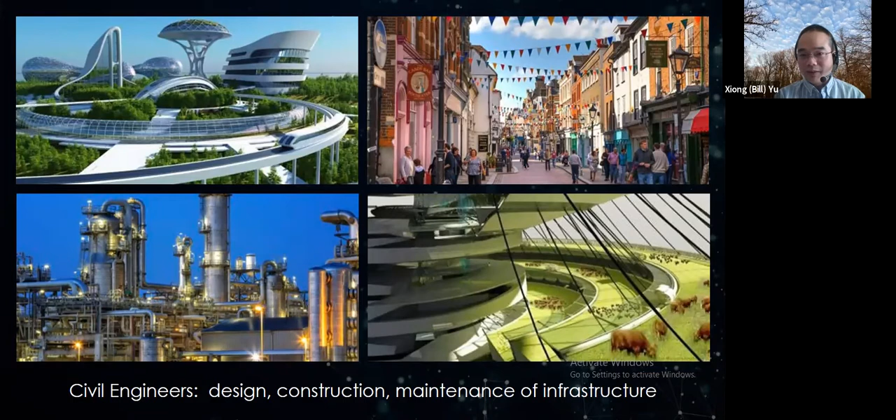We also face common challenges as our communities or society face. For example, climate change with more extreme weather, urbanization, population growth, and the demand for a greener way of life. These all put new challenges and opportunities for civil engineers.

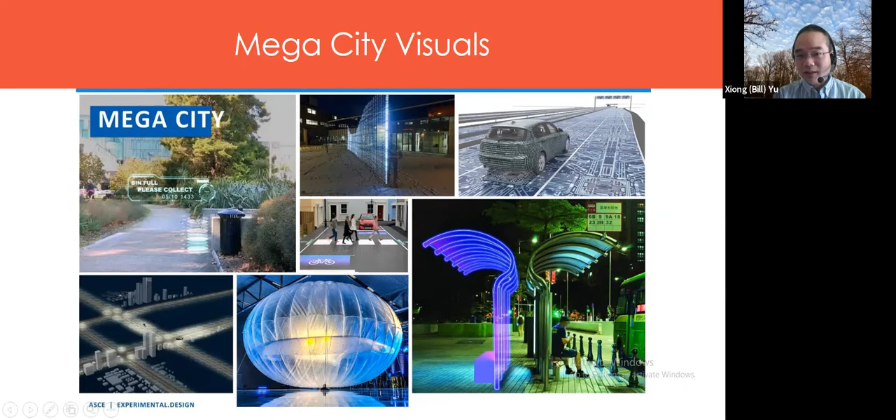The highway and road system might become a power station, charging batteries for electric vehicles. There's also a lot of smart infrastructure components built in to support community life at a mega city scale, because rural areas will also become more sustainable.

This is an architecture design for the future rural city—how the infrastructure will look, because rural areas provide a lot of support for food and other essential needs. We want them to be more resilient to disasters so agricultural productivity isn't affected by adverse climate, like drought.

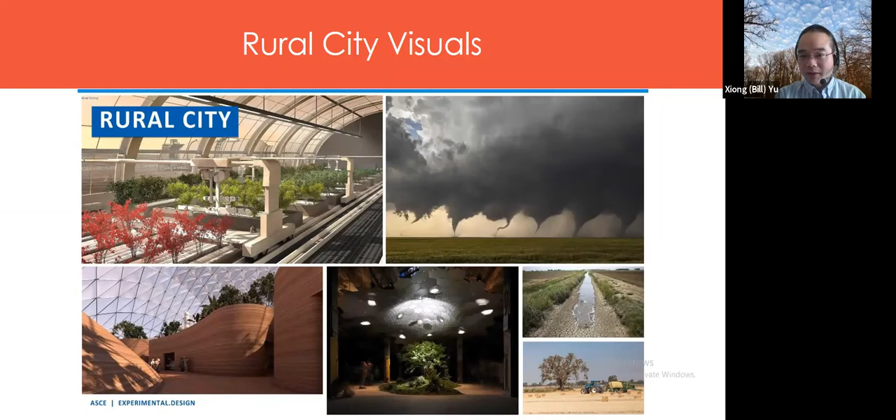There's a lot of opportunity to develop rural areas resilient to climate that provide produce support for urban communities. For people in communities near the ocean or Great Lakes, considering foreseeable climate change, there may be opportunities to develop more disaster-resilient communities, like the floating city vision.

For communities in cold regions, there's what's called a frozen city—how to support people's activities, like mobility, in a very cold climate environment. There's also space exploration, like lunar and Mars exploration. In the foreseeable future, civil engineers will be charged with building new, livable communities to support space exploration—these are some architecture designs for civil infrastructure in off-planet areas.

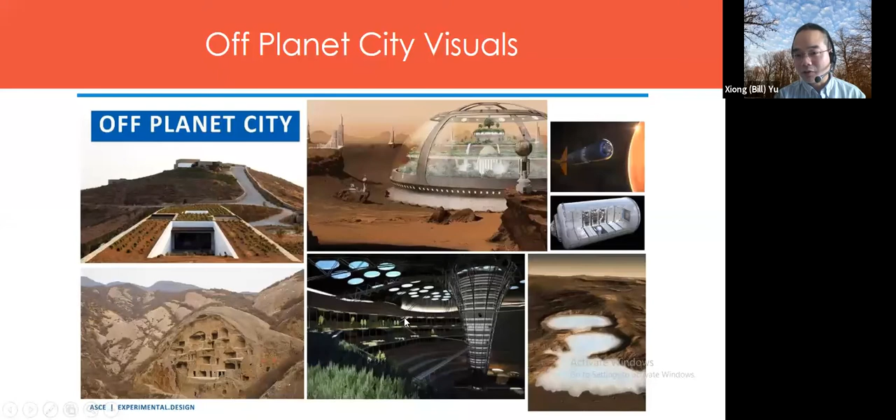In daily life, our life is also shaped by new ideas: how do we manage waste, how do we optimize structural design to achieve the best performance for ventilation as well as structural support, and how do we deal with green space and harvest energy? There's a lot of progress from civil and environmental engineering aiming to provide a better life experience for every resident of the community.

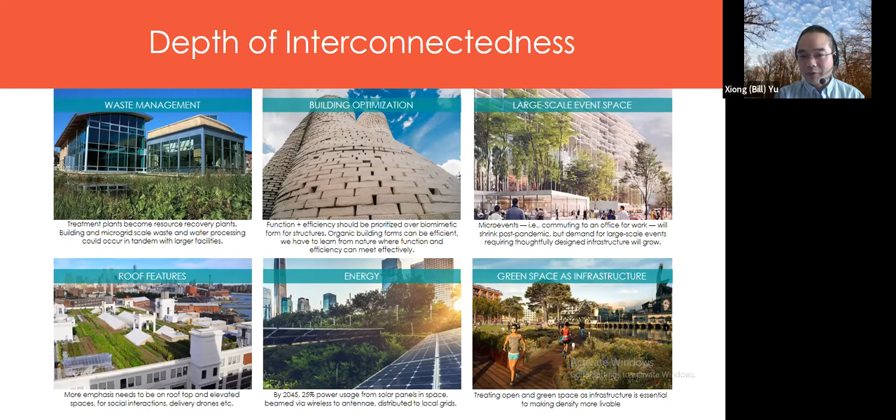For future civil and environmental engineers, we essentially need to be good at solving problems facing our communities. Future engineers also become predictors for our communities—we anticipate what may appear and prepare for it. This has been discussed by National ASCE as a skill set future civil or environmental engineers should keep in mind for their knowledge accumulation.

Toward this kind of goal, in civil and environmental engineering we have been building a lot of infrastructure support to enrich our students' research and education experience. This is a large-scale structures lab—from the photo, you can see the scale is pretty big.

So it has a strong floor and a strong wall, allowing testing of very large-scale structures. This is actually the actual component from a historical bridge in a national park that was brought inside the lab, allowing full-scale testing to be conducted.

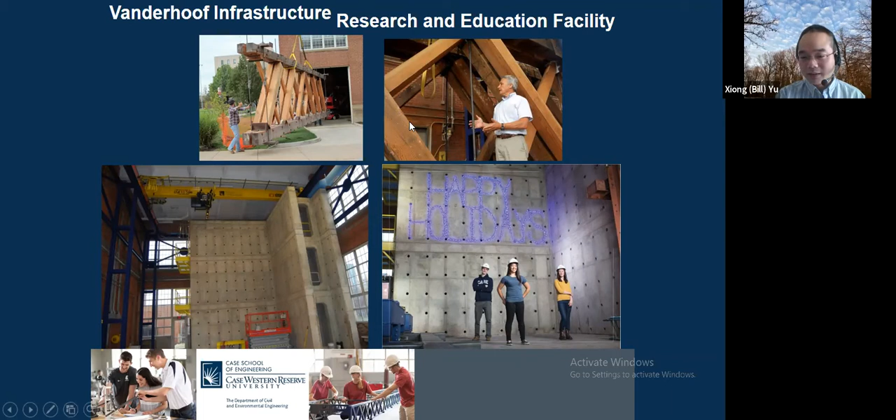This is a panoramic view of some large-scale testing, essentially looking at seismic resilience of a storage house - whether it's stable during earthquake shaking.

And then this one is about a pipeline system. We have 4 shaking tables that emulate earthquakes, and then a pipeline rises up to emulate, for example, a nuclear power plant - if there's an earthquake, whether the pipe will be safe.

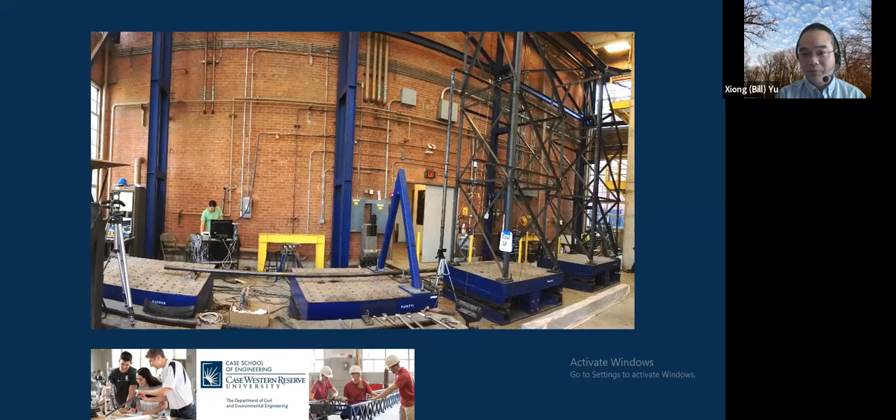Our structural engineering professors and students work on this kind of large-scale testing with facilities available at our department. This facility also allows testing of multi-span bridges, for example in California and New York, which are subjected to potential earthquake damage. These multiple shaking tables generate seismic excitation, and we can evaluate if the structure will be safe under different conditions.

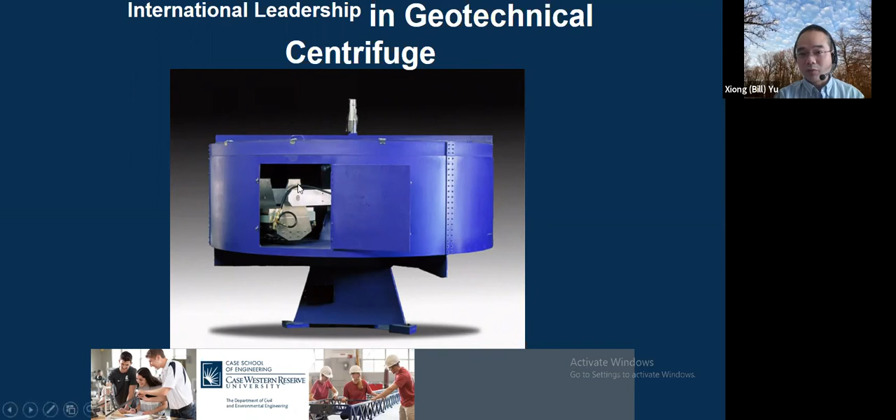Besides that, our department also has a centrifuge. It's a very unique facility that allows use of a small-scale setup to study the behavior of a very large structure. With the centrifuge, we can generate acceleration 100 times gravity, and with the scaling law, the structure can be scaled up by 100 times. So if we build a structure 1 meter in size, that represents the behavior of a structure 100 times larger. This is a very unique testing facility available at the civil engineering department here.

The department also built a new geotechnical engineering teaching laboratory, so students have the opportunity to work in groups to finish many different assignments evaluating the engineering behaviors of soil, rock, and geomaterials.

We also have department support to build a highly technology-enhanced classroom that allows student interaction with faculty very closely during the classroom setting. Everything is mobile, allowing arrangement for small group discussions.

The study area is also very popular - students usually utilize the space both for learning and for team activities and discussions.

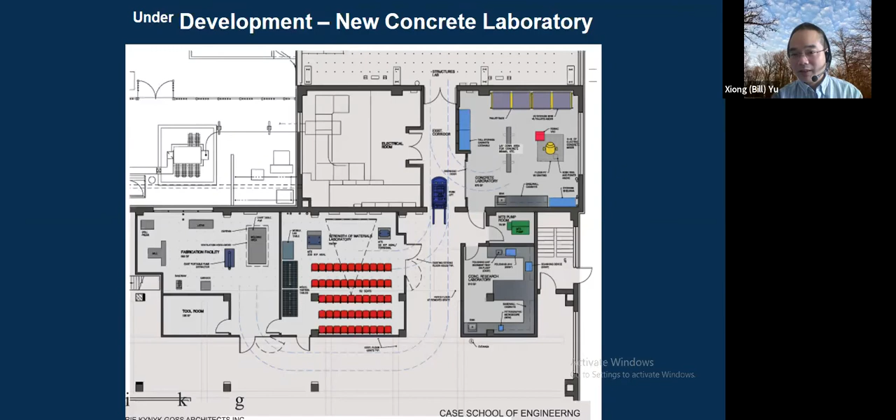The most recent development at our department is the new facility for the concrete lab. It will allow students to participate in training and also in research to study the behavior of concrete. Construction is anticipated to be finished by the end of this month, but most of it is already done. So that's the overview for civil engineering.

As for myself, I have pretty interdisciplinary training - in civil engineering, and also in computer science and electrical engineering. So my research is in a very interdisciplinary domain. I joined the university in 2003, so it's been a long time since I started working here, and I've enjoyed working with a lot of undergraduate and graduate students.

My research area is quite interdisciplinary, so it's kind of hard to capture in a short presentation. I'll share two examples, and then we can follow up with two of my PhD students who can share their research activities.

One research area my group evaluates is the multi-physics process in geomaterials. Geomaterials are porous materials - materials with void space. For example, soil that we deal with every day, and concrete and cement are part of geomaterials. Gas hydrates are energy materials, also part of geomaterials. We've broadened the concept to porous materials more generally - biomaterials, ceramics, rocks are all part of porous materials. My group studies the multi-physics processes in all kinds of porous materials.

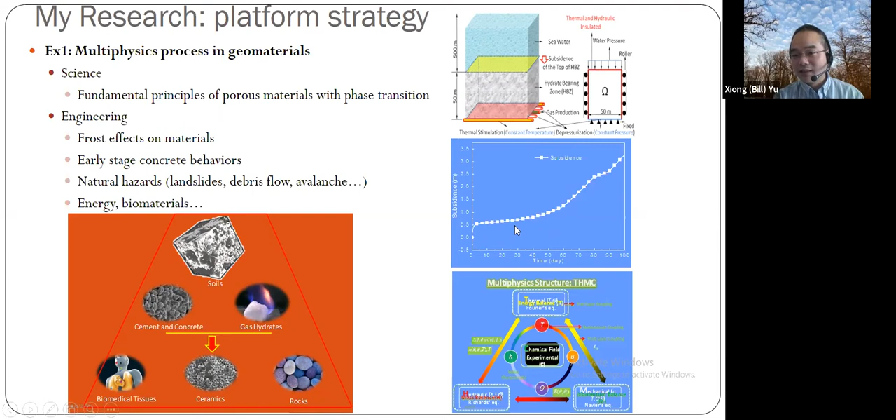In the study aspect, this is one example: for natural gas, for gas hydrate, we analyze how the ocean floor will settle when we extract natural gas from gas hydrate under the ocean, because of the energy extraction. It's a long story with a lot of effort behind it, but this shows how exploring this kind of energy causes the seafloor to subside, involving a very complex model process.

Another area of my group's research is about intelligent infrastructure. We try to make infrastructure resilient and smart.

This turns out to be a very complex issue requiring a lot of scientific evaluation. My group has been working to understand why the soils are taken away, because they are detached individual particles. We use innovative sensing strategies to help provide a warning, to make bridge users safe. So that's some of our research in this domain.

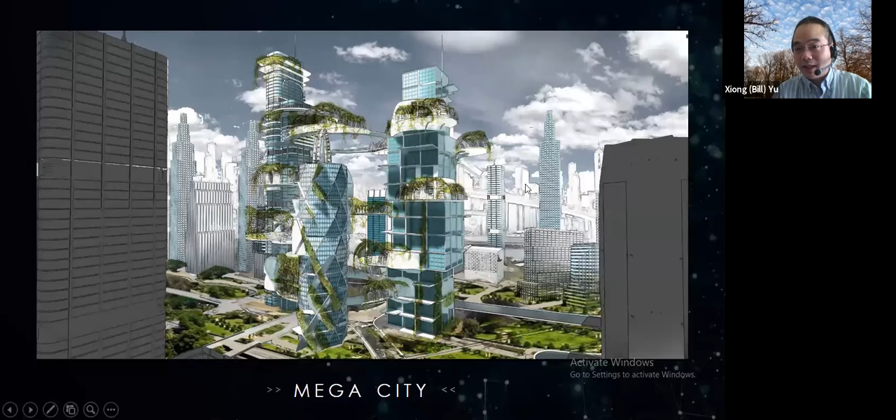And essentially there's urbanization, ASCE's vision that will lead to a lot of buildings that not only provide residential areas, but also green space that interacts with people, improving quality of life, efficiency, and connections. So that's some of the ideas of how the future of the world will look like.

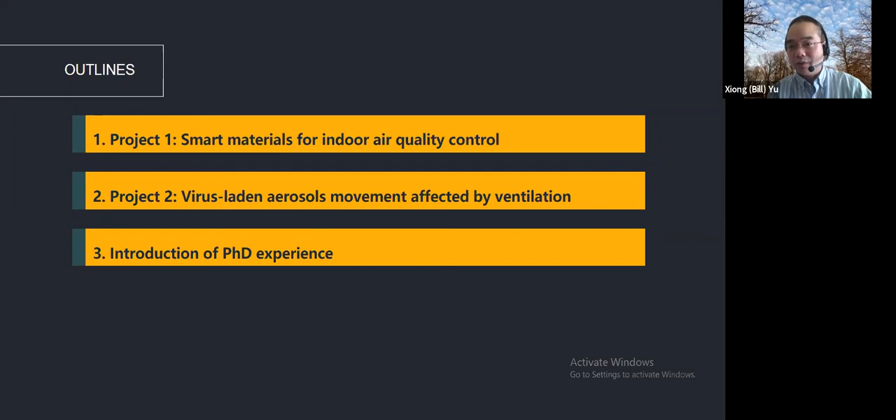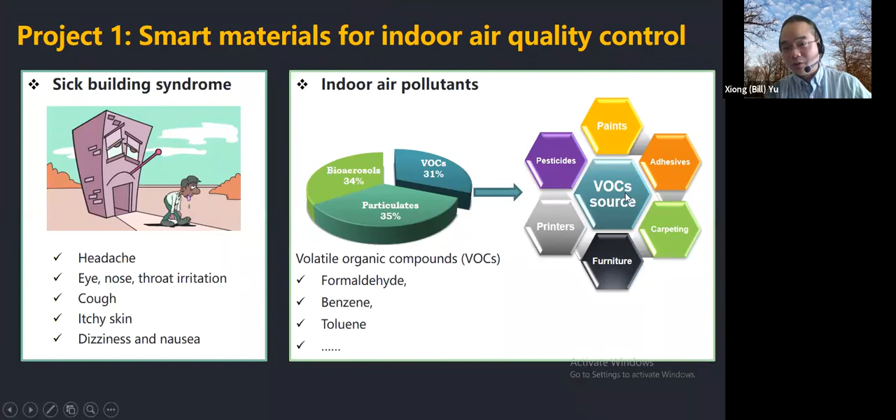She also shared some of her PhD experience. Because we spend so much time indoors, 80-90% for some people, indoor air quality is a big issue. The indoor environment has a lot of possibility for volatile gas from carpet, furniture, or old utensils, which can cause issues for people's health and feeling.

Traditionally we deal with this through ventilation, exchanging air, but that compromises energy use and energy efficiency. So her research looked into how to use decoration material inside buildings to improve air quality instead — that's her goal.

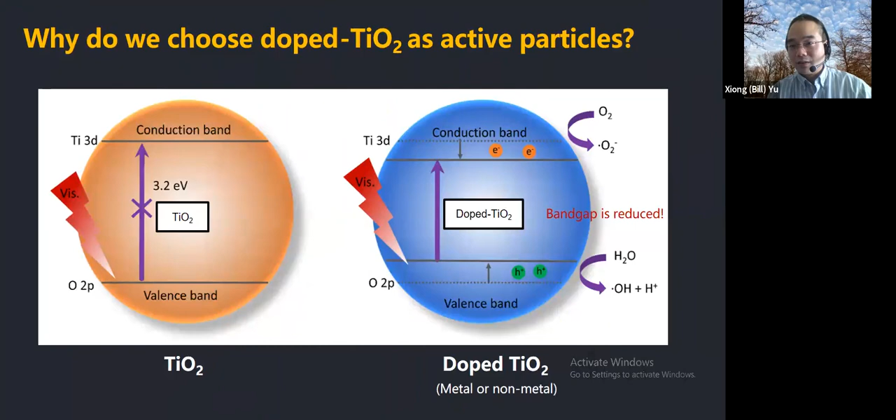She used photocatalytic material, incorporating it into building materials so they purify the air automatically with ambient light. The material is activated by light energy, and her research focused on using that light energy to purify the air based on the photocatalyst.

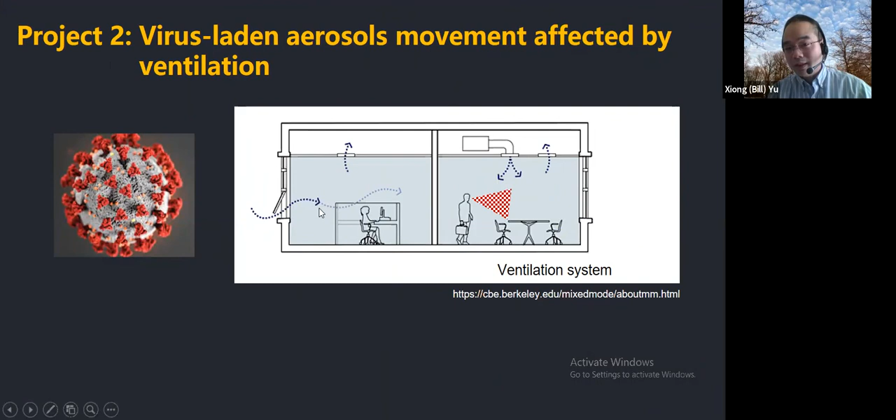The other study was concerned with how to mitigate the danger from aerosols, since they can carry the virus. She ran simulations to understand the flow field, which can potentially lead to ways to effectively capture aerosol to improve the indoor environment.

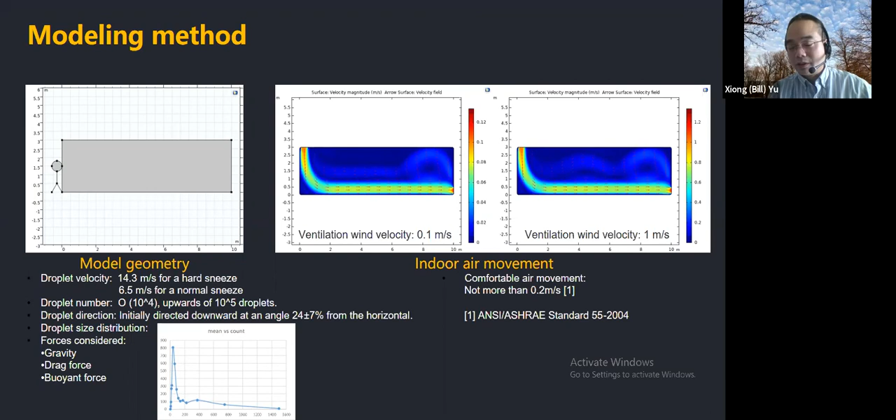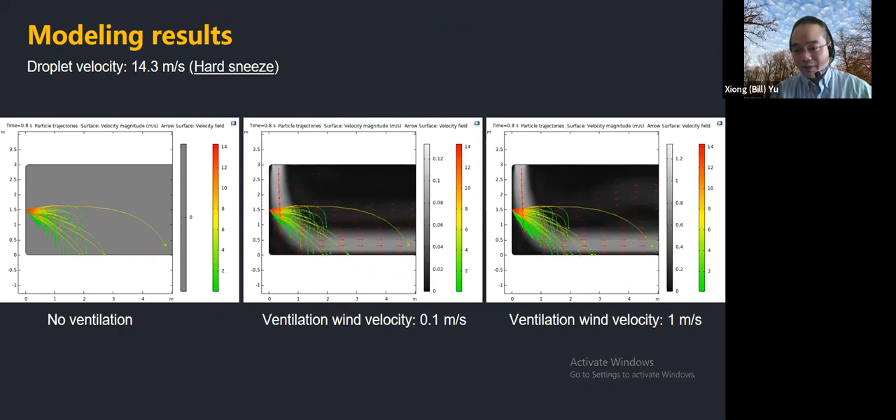These are some of her simulations — if a person sneezes, the droplets and aerosol, how their trajectory passes through the room, how they're affected by ventilation. This one has no ventilation, this is similar to roof ventilation; with roof ventilation the trajectory will be affected. Based on that, there's room for refined ventilation design to mitigate latent risk and improve the indoor health environment.

She tried to share her career pathway and the decision points for pursuing an engineering career, particularly in her case, pursuing a PhD degree. But again, because of the setup issue, she cannot speak for herself.

I think Xijing also put together something, but we might not have time to go over it. Xijing works on self-healing materials — if there's damage to a construction material, like a crack in concrete, how we can self-heal the crack. Her research looks into using biology systems to automatically heal the cracks and make infrastructure more durable.

Okay, that's my overview. So are there any other questions?